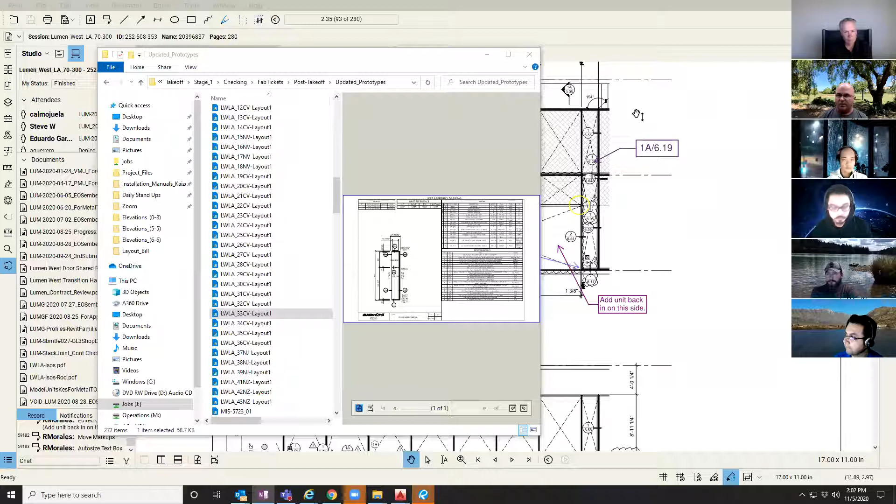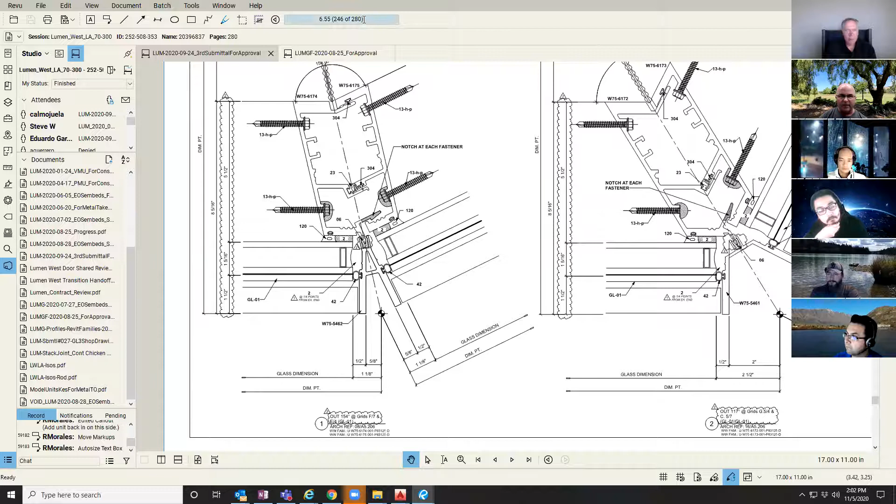On the recent project we're working on, this lumen has a lot of very complicated conditions happening. There's some very specific things happening when we get to some of these corners and how the parts are working, how the vertical trim and the head members, the cut lengths of our horizontal face stops at the head and the sill. We have an articulated vertical mullion with an offset to the front and back, and it's got very gigantic glass in it. So there's a lot happening on the project.

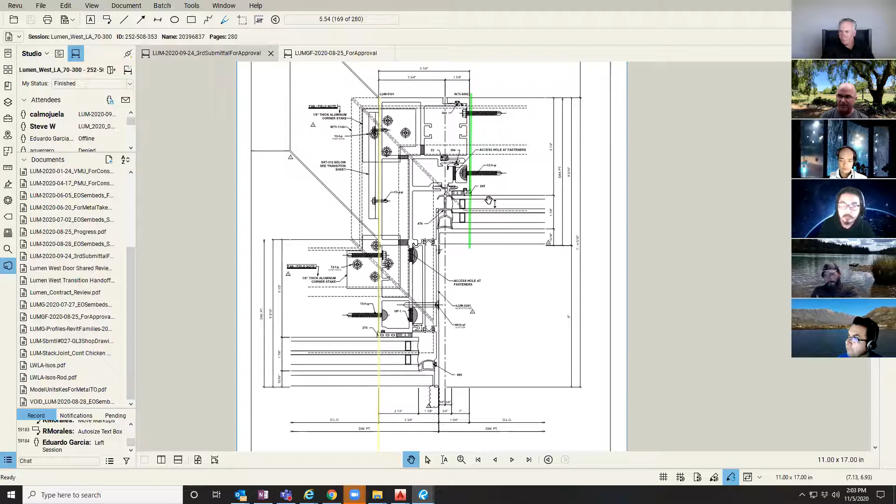We built out a series of prototype units and refined those a few times as we were going through. The shop drawings were getting further refined based on having calcs done, some markups from the drafting and takeoff team. The PM noticed some items. So the set we're working with now, this 924 set, has incorporated a lot of updates from when we first started building the prototype units.

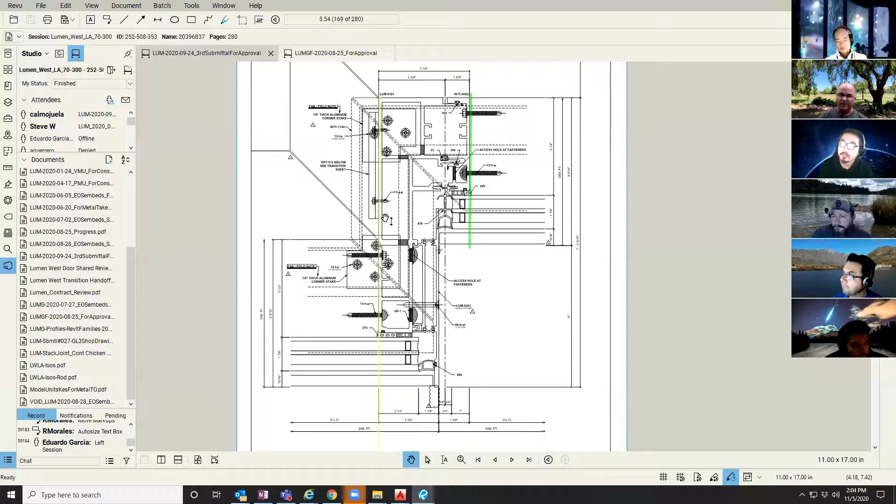We recently went through and finalized what all the prototype units were doing. We fine-tuned them so they've got a lot of additional detail in them. So I wanted to show a few examples of how some of those parts are working, some of the CAD layouts we're doing, and some of the logic we're trying to encompass in those prototype units that should enable us to do our checking process without having to rethink the entire project, because we've done that work up front.

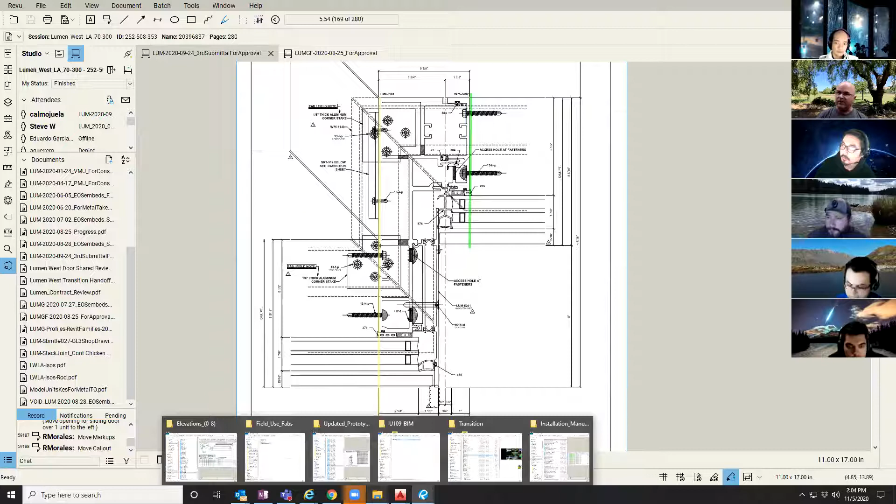For the example, I want to use this unit 33CV. So what I'm going to do is put shop drawings on one half, and then I'm going to open up this blank one on the other half.

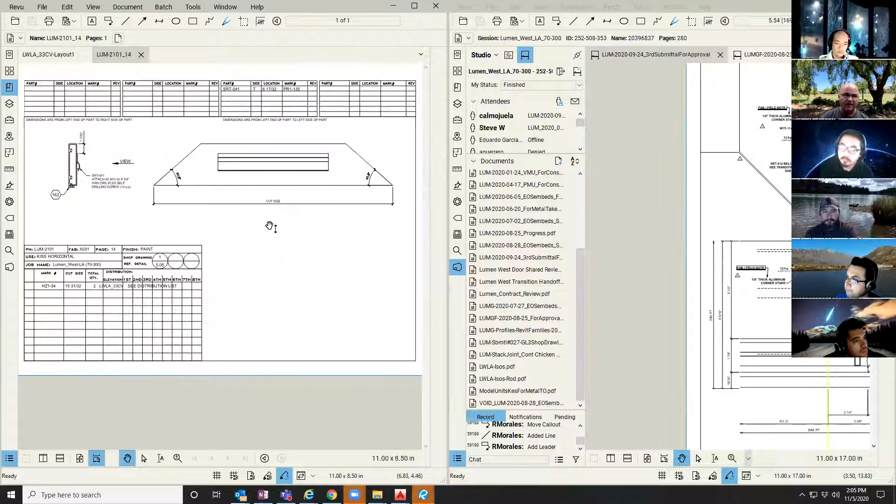This is an updated prototype unit. As a prototype unit, it was developed with the same left and right detail. Similar to a lot of the prototypes, in this case it's a corner. If you check a horizontal type part, it's going to be mitered on both ends. In this instance, it's a 41.5 degree miter on both sides.

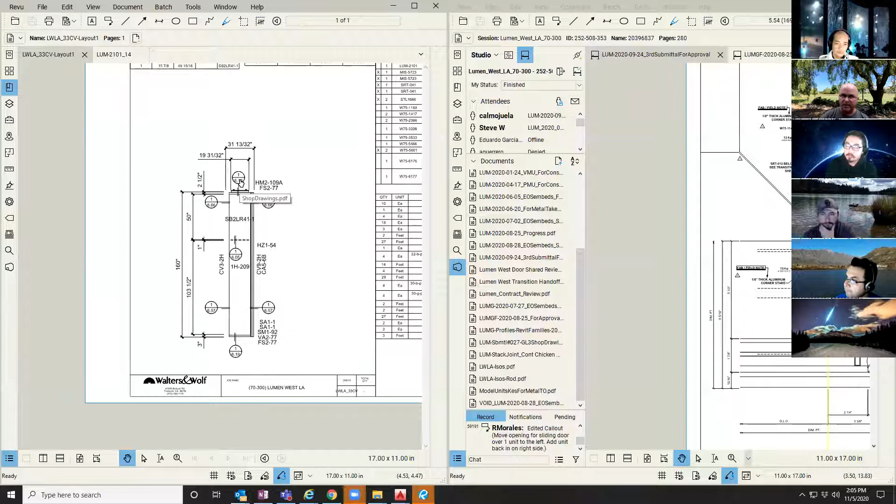We have the cut size laid out here as 19 and 31/32. The DP to DP dimension here is 31 and 13/32. So if you were strictly looking at the PDF, you could still determine what the DP to the cut size is on this particular miter, even if you ran across this on a job condition and had this 1/6.57 detail, which would be this particular corner.

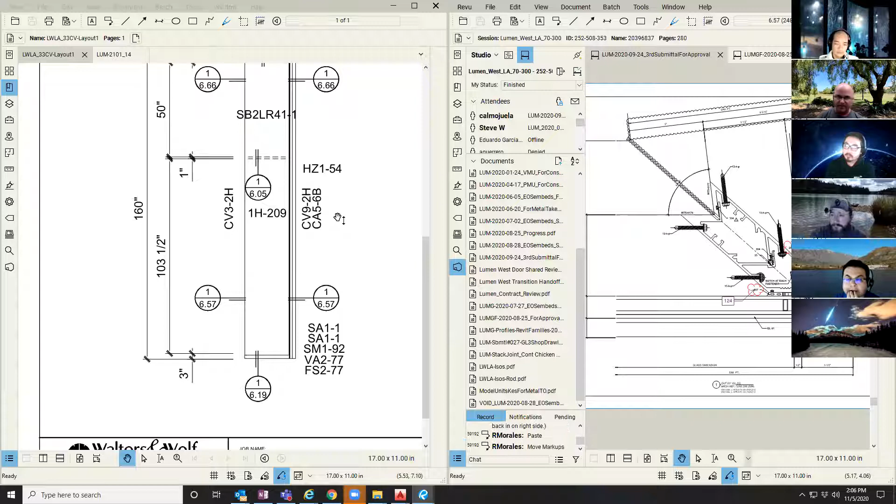If you had this on the left side, for example, but then had a different detail—either an articulated vertical on the right, or maybe there are some walls that are straight, so it might just be a split mullion on the right—by looking at how the math is set up from the DP to DP compared to the cut size on the part, you could do your deduction, dividing that in half because this deduction is on both sides. That would give you the deduction from the dim point to the cut size on any of the horizontal parts.

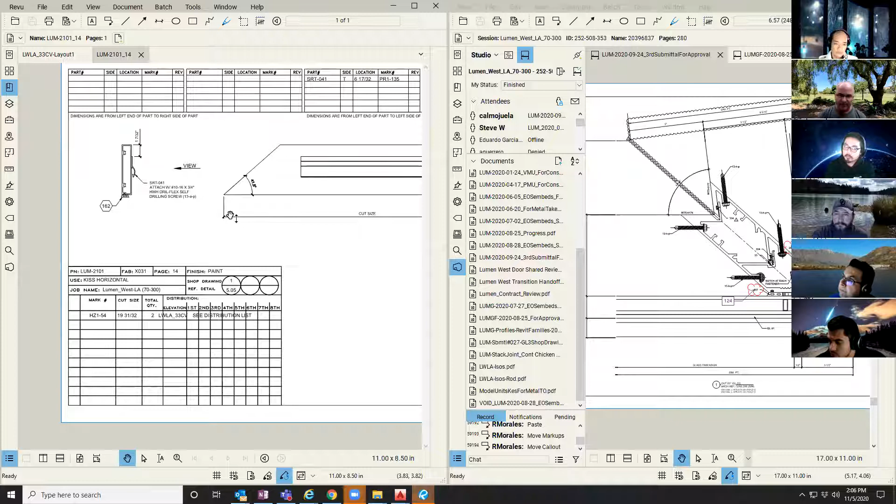So that's one method we might use to do that. The other way, however, is we have this on the detail, the 83 degree. We did a whole series of CAD details—let me bring this over to the screen.

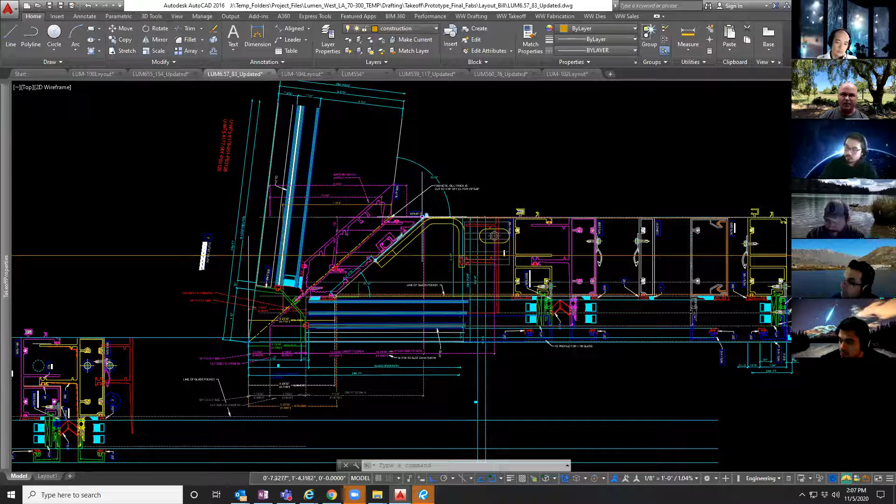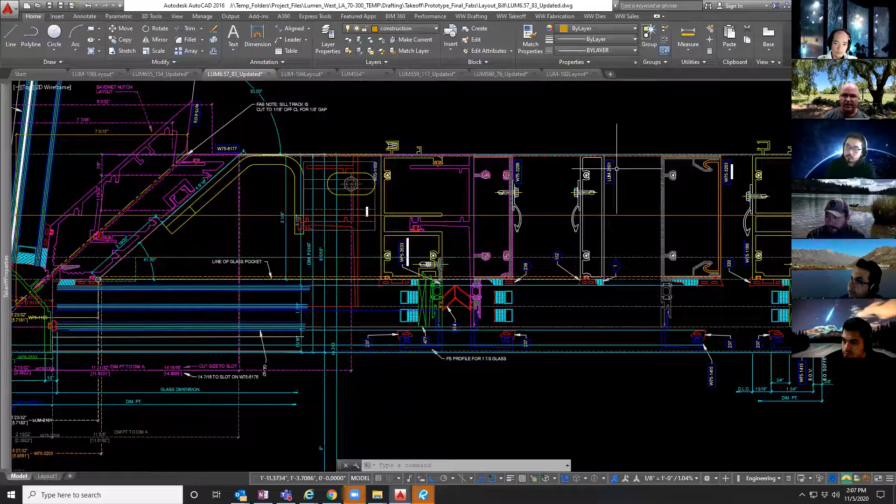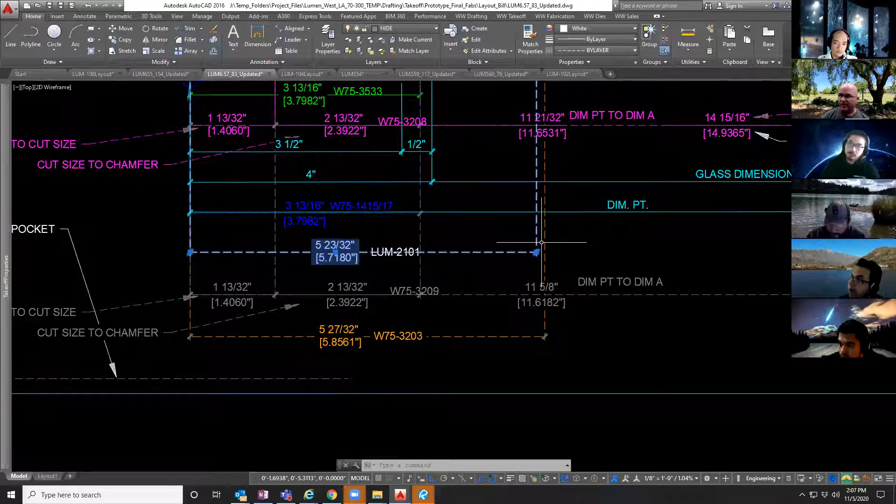The CAD detail shows the vertical parts, the orientation, what the degree of the corner is, and then it's got all of the horizontal parts dropped in there, color coded so you can actually see each of the parts and their cut lengths. That particular part I brought up first is this LUM 2101. If you hover over that white line, you see it highlights that part, so you can see the overall shape, how it's sized. It's cut to daylight, and the layout here is from the dim point to the cut size of that part. So that's another method you could use if you wanted to use the CAD drawing to review that.

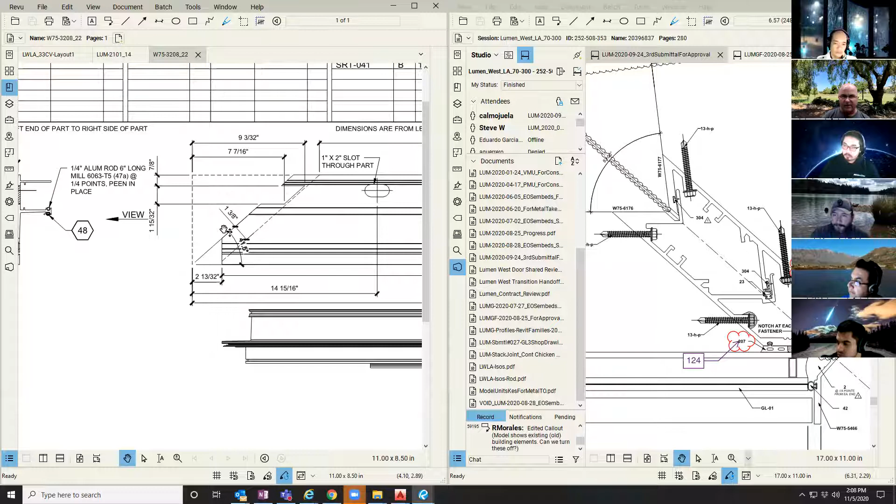Let me go back to the unit for a minute. If you were tracking your way up this unit, when you get to this head member, you'll see that it has a lot of things happening on it. In addition to the miter, it has to overlap the top of the vertical. It needs to be notched for the bayonet. There's a slot in it in order to access a floor type hook lug. The corner has to be lopped off in order for the face stop to work. And there's cut size, dim A's and dim B's. So there's a ton of things happening here.

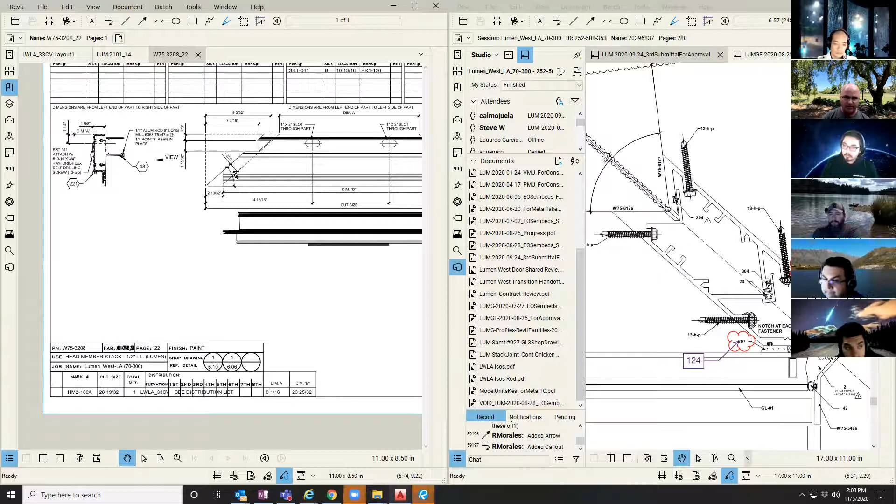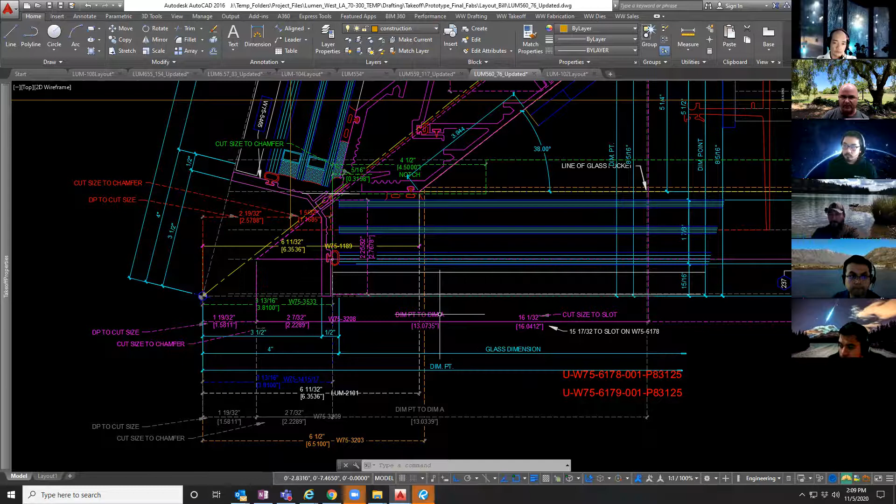If you are going to check this to verify each of these conditions, and you went back to your CAD drawing for that, this was the 76. You can find each of those conditions on the CAD drawing, and they're all laid out with the part numbers, the deductions, what it is from the dim point to the cut size, from the dim point to the dim A. It's showing where the slot goes, where this is the slot where you have that floor type anchor that's being used, but we need to access it to be able to basically jack the unit up and down to level it at the corner.

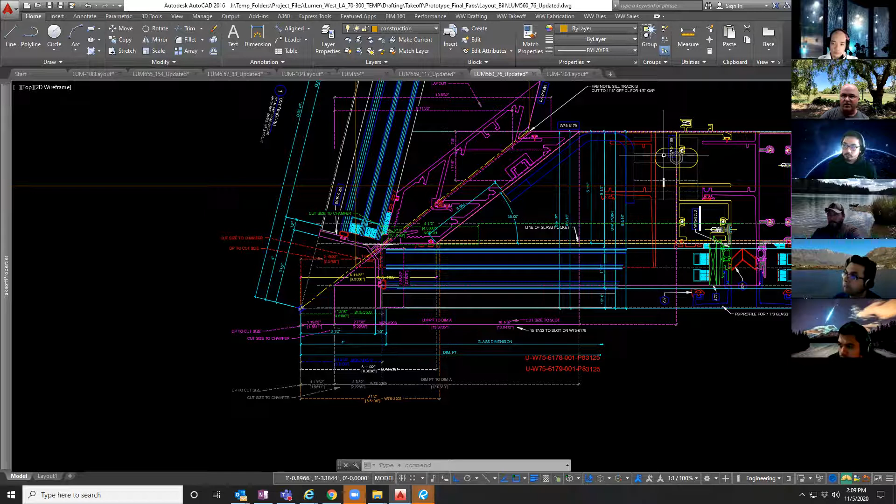And all of these layouts have been verified. So if you came across this particular unit, you could go and validate all of these points using this CAD drawing because they've all been laid out.

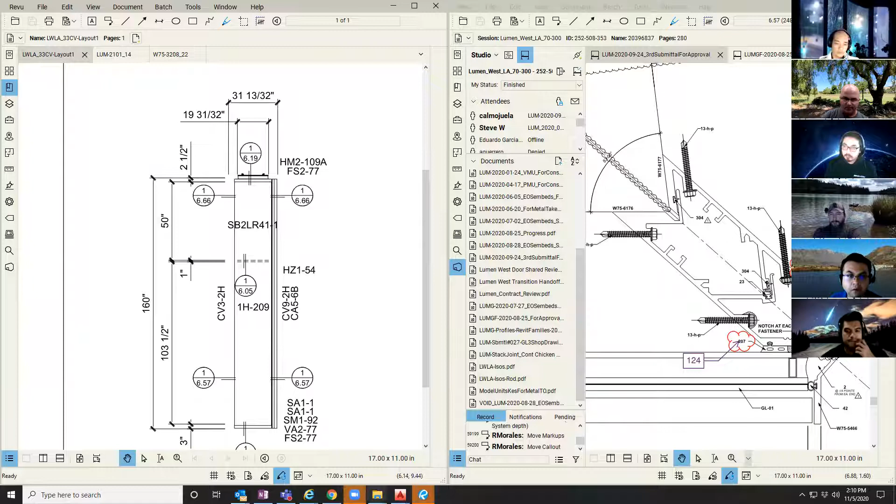But the shortcut that I would propose is that realistically, when you get to this unit on the elevation, you only need to go to - now this is a prototype, so this is not a real unit, but let's say this was your DP to DP. You would just need to go from the DP to the cut length on that part, which again you can get based off of here. And on your head member, it's this 3208.

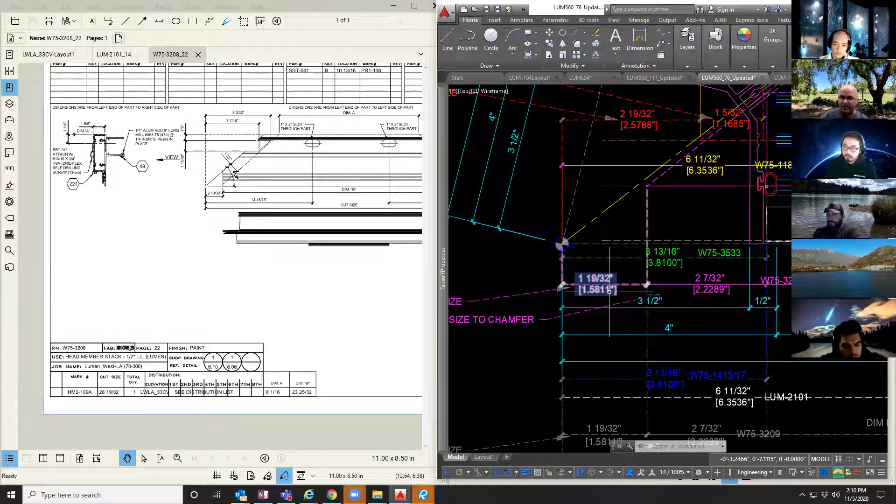So you find your 3208. The cut size from the DP to the cut size is listed here. So in practical terms, you could just go DP to cut size on this end, find whatever the other detail was. So if the other detail was this articulated vertical, and it was this one in the front, then you would find that part, go to your cut size on that on the front side, and then you'd be able to do that deduction on the other end of the unit.

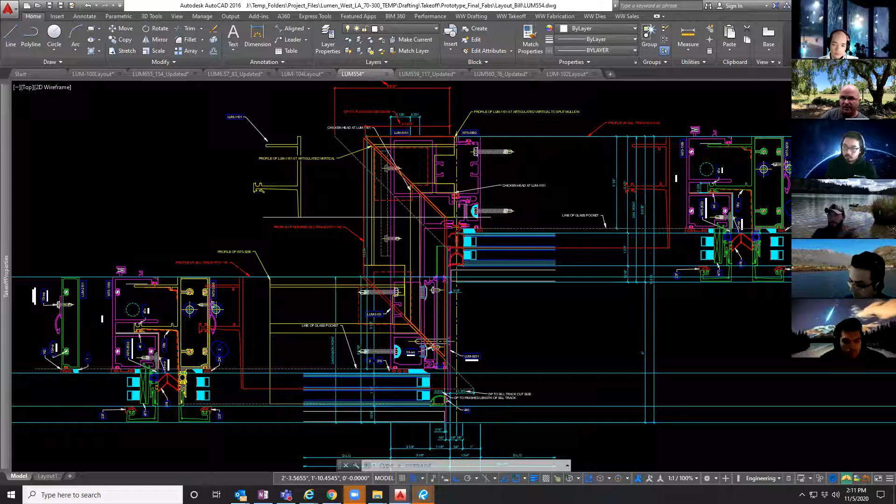After you did those two deductions, match the cut size. The remainder of the fab that's on here would already be validated based on the prototype units in the setup.

So in order to create a slightly refined checking process - the prototype units have been validated, and all of the layouts, you'll see that there's different offsets to that slot from the left and the right end. So all of those are completed and verified.

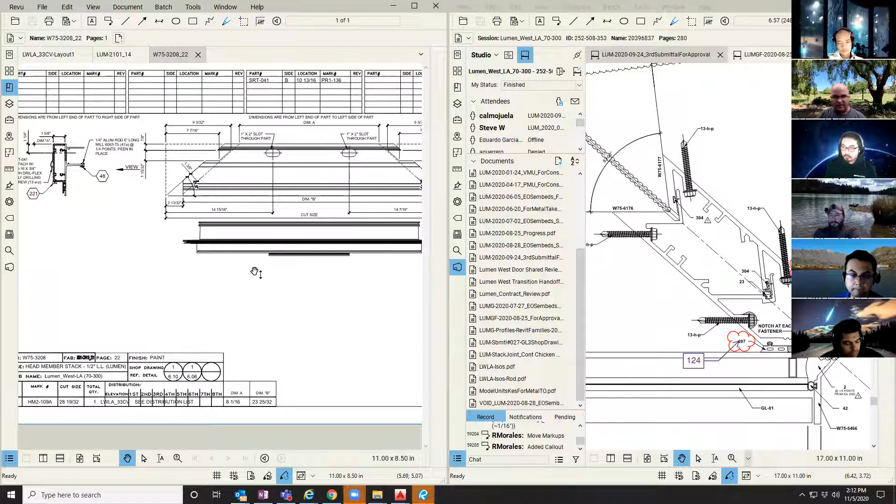So in practical terms, if you know that's the correct angle for that part, and then on the other side, you could look at the cut size for that other template as well. Then you can get your cut lengths and all of the associated dim A's, dim B's, the pocket filler lengths for your SRTs - all of that would be correct.

So that's just an additional tip on how to use some of the information that's already been developed in order to streamline that checking process.

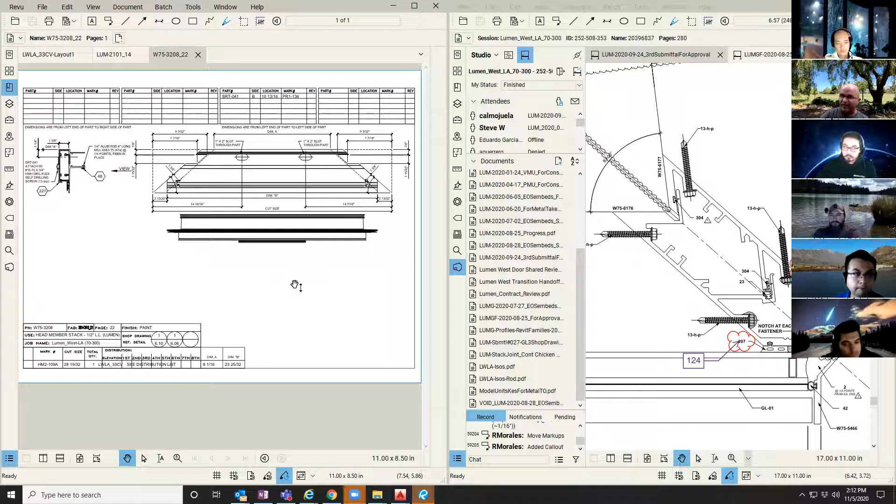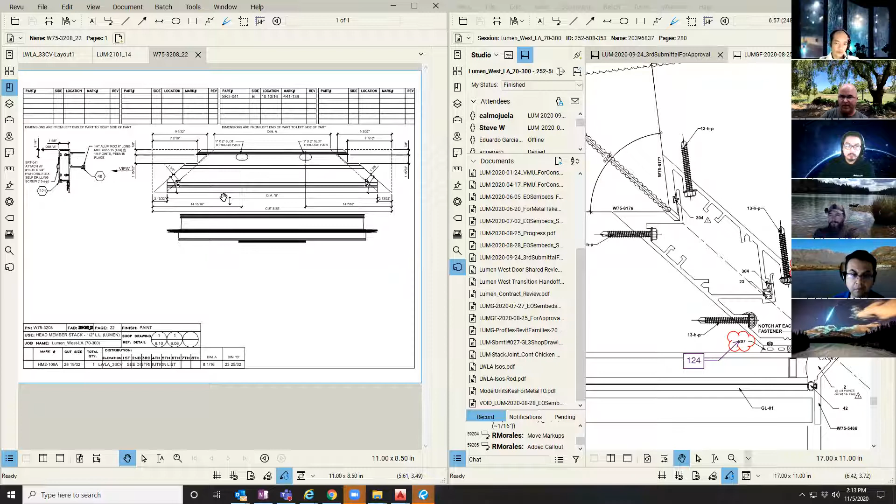That doesn't mean that you don't look at things and make sure that they make sense. In fact, if you were looking at this for the first time, you may want to verify each of those independently just so that you're familiar with them. But once you've got to that point where you understand how it was developed, how we got these templates built based on the prototypes, then you can use that little shortcut to just get your cut size, and the rest of it is already correct.

Okay, so let me open up the floor for a minute on that item. Commentary, questions?

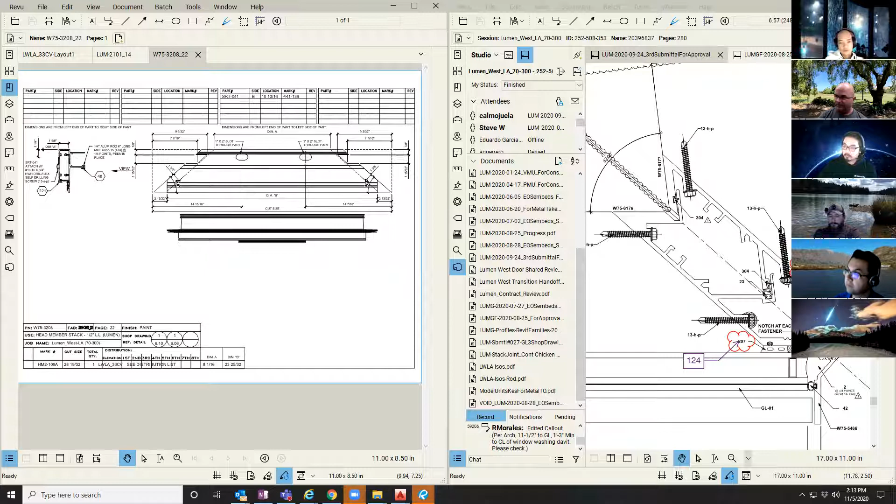It seems like that is... I don't know, I feel like I'd be hesitant to do that, Bill, but I guess it makes sense, as long as the end cuts and everything match what's been established before. But I guess you'd have to be the one that had worked on that before and know that's what they're supposed to be, or have something else to compare it to. It just seems like a lot of times the end conditions with these notches might be a little different from part to part for a variety of reasons, so you'd have to watch out for those kind of things.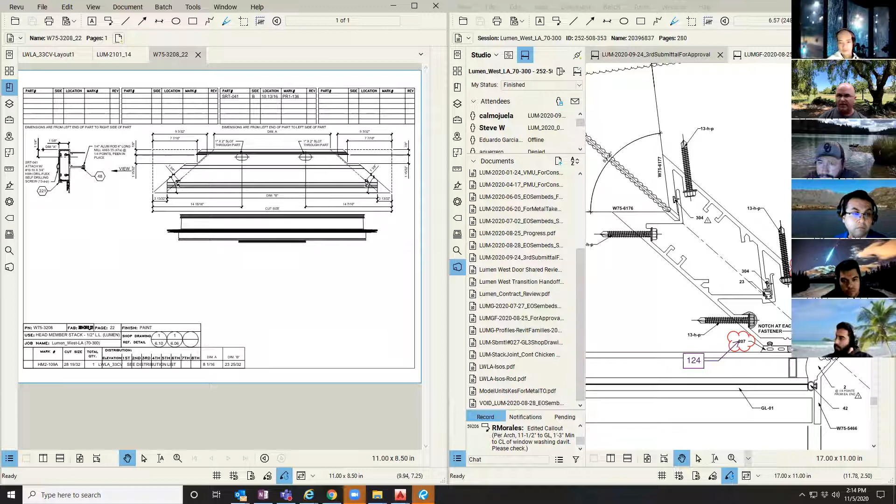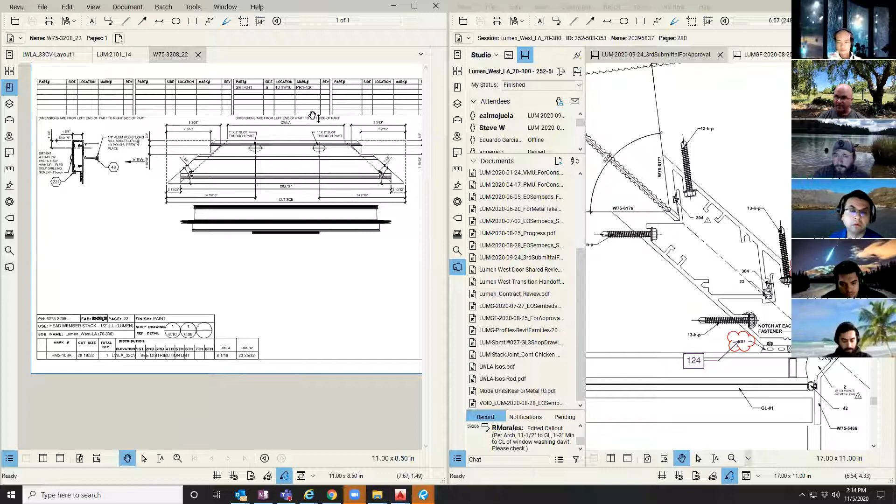And the other caution there is that if you have a left end and a right end and they're assembled, they're going to be on a template showing the equals, because your left and right end would be a fab whatever equals a whatever. So those combined versions of the templates, you'd need to look at them to make sure they make sense. If, for this part on that CAD layout, it was showing that was only 12 inches, but you were showing a dimension similar to 16 inches, that might trigger that the left and right connection didn't make sense. That's why we look at things with a critical eye to make sure things make sense.

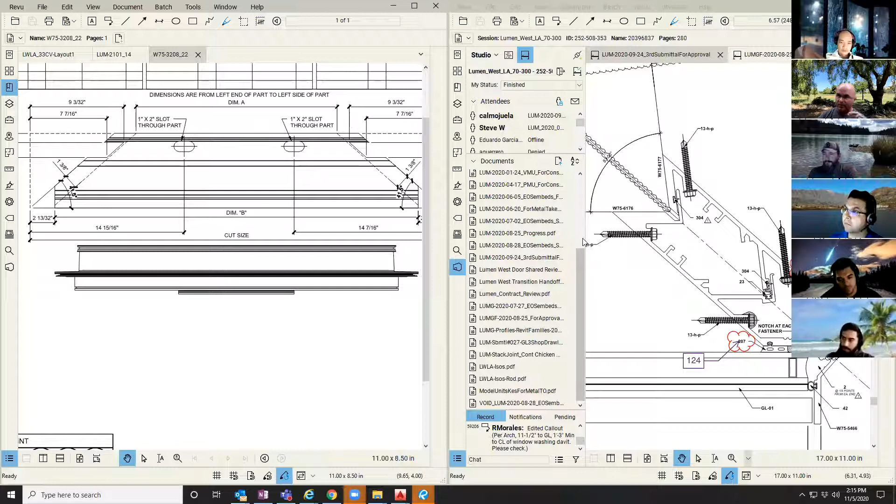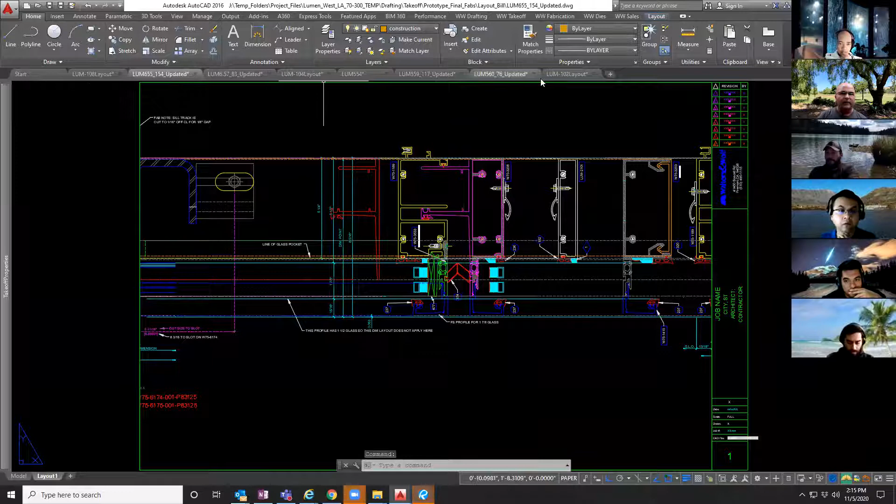But Quentin, I like that the thing you pointed out especially was that I'm familiar with these because I did these layouts. Chris and I worked on these a lot, we refined them several times, and so I have that high level of trust. If someone's coming in from scratch, you need to build that trust a little bit. The way you would do that is by going to these layouts and seeing, okay, this is how that thing works, I understand what's happening here. It makes sense. Then when you combine this layout with this layout, the 554 and this one, when you combine those two and you're proving your math, then it starts to make more sense about how the parts are sized.

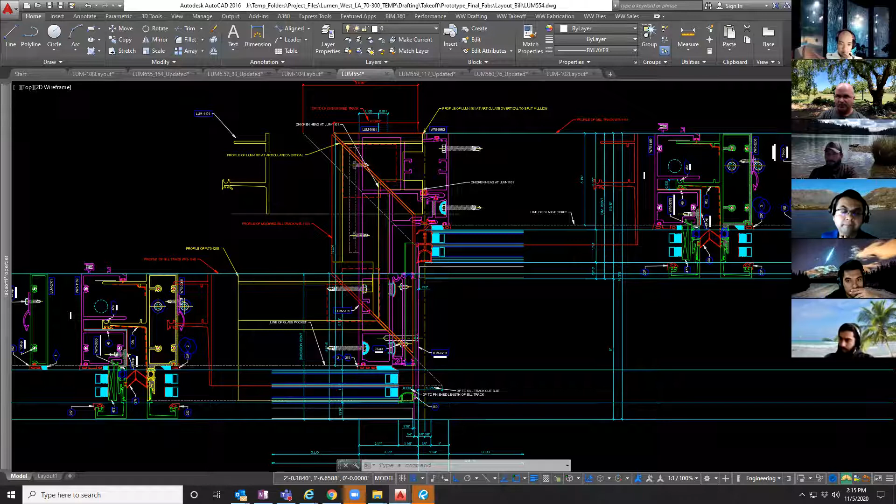So also another comment, if you go back to the PDF, I don't think we normally show, of the part, that dim A at the back extending to the end of the part. So depending on the angle, that'd be something you'd pick up in your layout. But is that ever a dimension that would be shown on the drawing like this? Because if we just go through, we figure out our cut size based on the dim points, and then you can see dim B would be pretty easy because you can subtract those two and 13/32nds from each end.

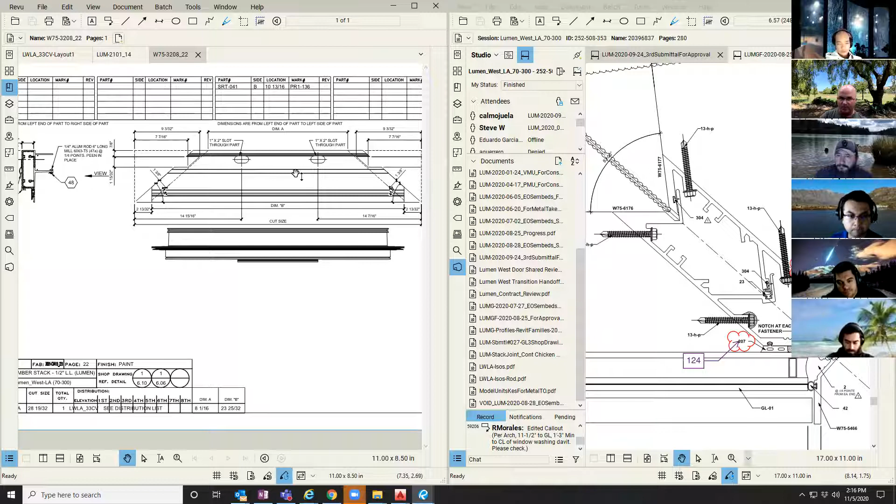Yes, but then dim A, you'd still have to refer back to your layout to know what deduction to take from either end. Correct. And in this case, because there were so many points critical to how the part indexes, especially because it ties in with the corner beads, and these run through where the horizontal face covers run short with a specific gap, we did intentionally add in the front finished cut dimension and the back finished cut dimension as well, so we got all of those reference details. If you were combining with another one, if it's articulated, this will just be a straight cut on this end, but you'll still have that dim A to get how that part notches over the top of the articulated vertical, and then how it comes over to this mitered corner.

I have a question. Okay. Can you have a dim B without a dim A? You could, if the dim A... the dim B was specific for what it was doing. You might have a dim B as a finished cut size on a compound mitered part, for example, and that finished cut size might be a byproduct of the cut length and the compound miter. So if it was aligned with the glass pocket, if it was a vertical part tilted back and cut at a compound miter, your dim B might be your finished point, long point to short point along that glass pocket. So you may not have a dim A on it.

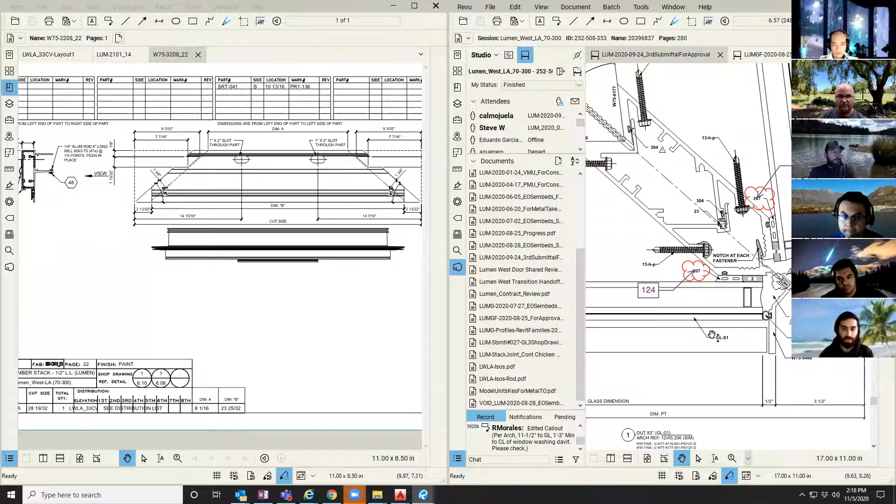So on your fab, is this something we've established where dim A would be your back finish dimension and dim B would be your front finish dimension? So like, let's say for a sill member at a capture, you don't have that notch that goes over the vertical, right, so it would just be a straight 45, but then you need that front notch because of the trims you have on the corner trim. Yes. Would we still dimension it and call it a dim B, and not really need a dim A, because that miter will handle that cut size?

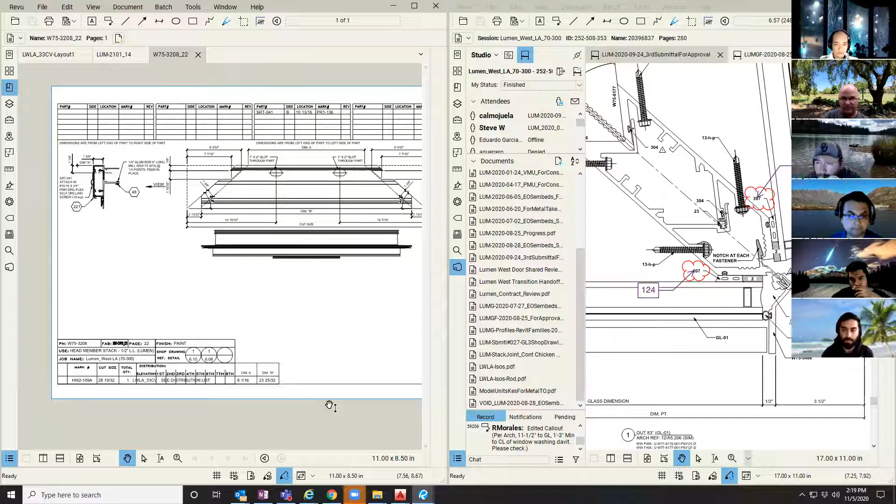That could be one way that we use it. We haven't documented that yet to see if that's the decision. I know Chris was tinkering around with some ideas that dim A would be in a specific plane on the part, where dim B would be in a specific plane. So basically dim A on the back and dim B on the front. But we haven't solidified that yet.

Okay, because I'm asking because Lumen ground floor has that. So I need some type of dim, but should I call it dim B or dim A or something else? I would say if it's going to be similar parts, we have a similar setup for the Lumen parts. Try to keep the dim A's aligned with how we have dim A set up here. And if you don't need that cut length, then just call it dim B. Cool, yeah, I agree. Okay.

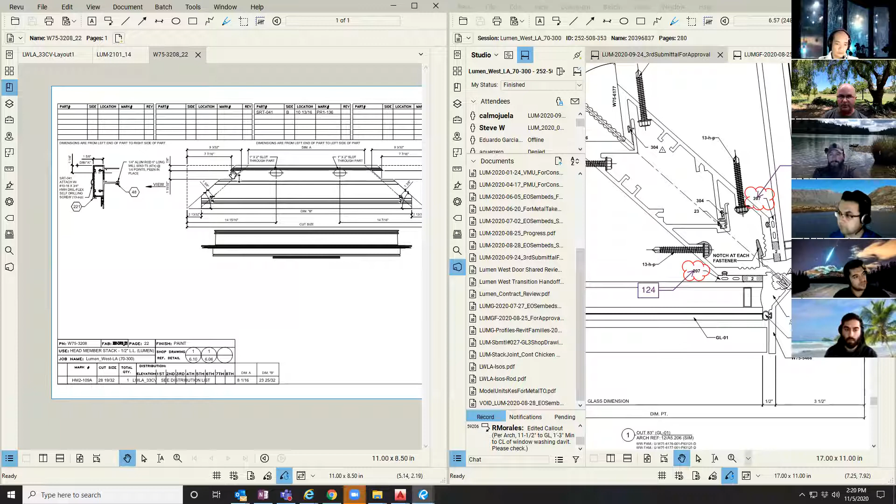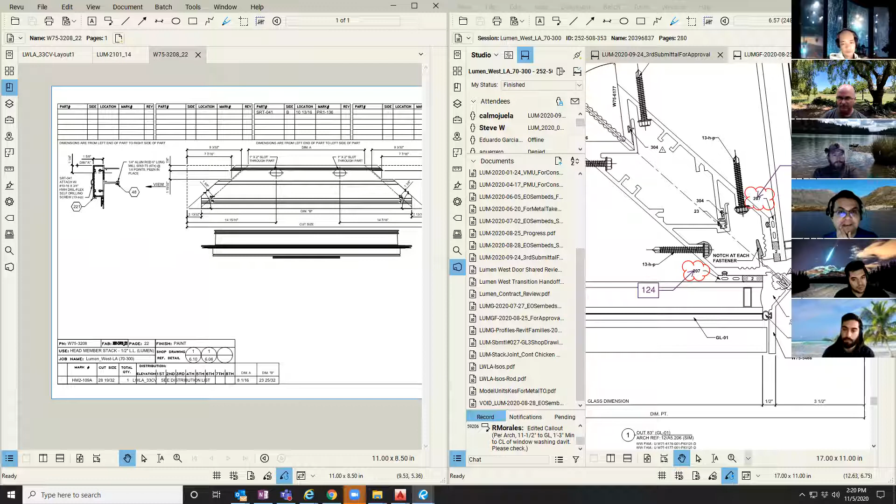What I want to mention is that I like the idea of the color codes on the CAD file, because I know downstream when we started the process, it was hard to understand the logic on the cut size. But I really like the idea, like you have the part with the color, and I think it's pretty easy to find and to follow the logic when you're checking units. So I really like that idea. It was hard, yeah, I knew there was so many things going on here.

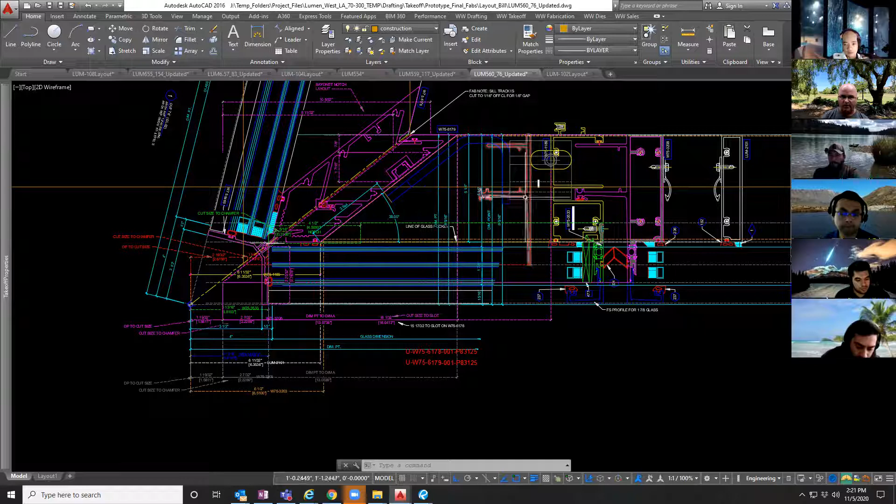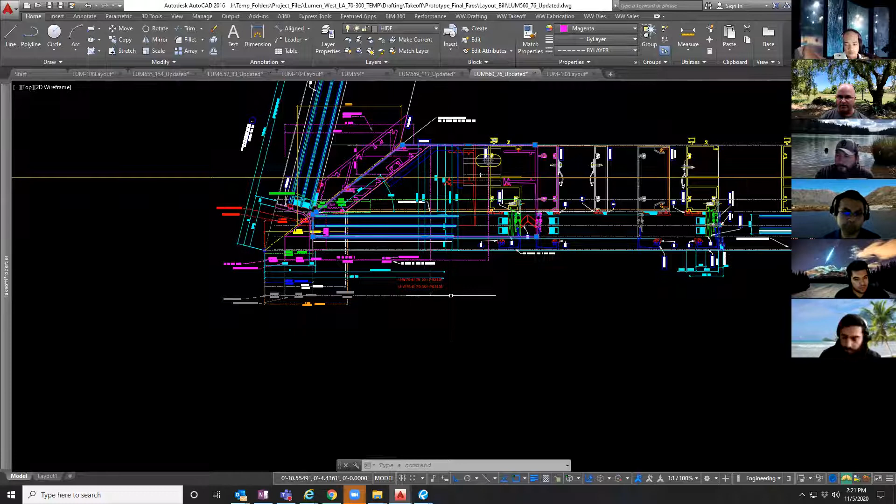I wanted to make it so that the visual controls made sense. So each of the parts is color coded. Plus, you can actually see the profile of the part when you go to the sill part, that's where the sill is. When you go to the head, that's how the head needs to be notched, for example. So all of those things are incorporated into the layouts because there's so much happening there. If they were all just on a single color or a single layer, it is hard to see.

Yeah, and the other comment that I have, it's only an idea, because I have something similar when I'm working on the sunshade brackets and brake shape. I know it's completely different logic, but can we create a folder into the project for each single project, so we combine all those kinds of layouts or something? I know it's on the prototype units, right? But I'm talking about that.

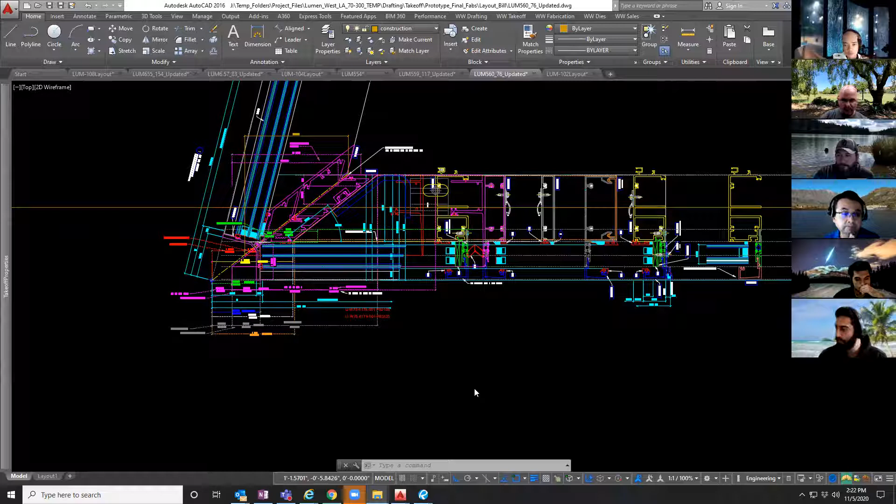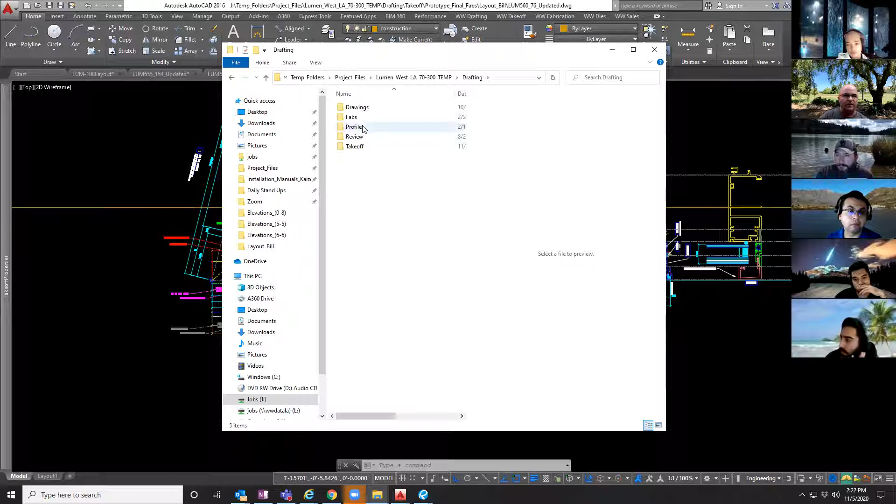So we do. Let me just walk you through how to find that type of folder. When you go into, this is the temp folder in the J drive, but let's go to Lumen here. When you go into drafting, then under takeoff, we have the prototype final fabs. So there we have the layout folder. So this is the layout for all the things that are specifically related to the prototypes. Now sometimes we'll also do additional layouts that are more for quick reference, and they don't have the amount of detail that we put into those.

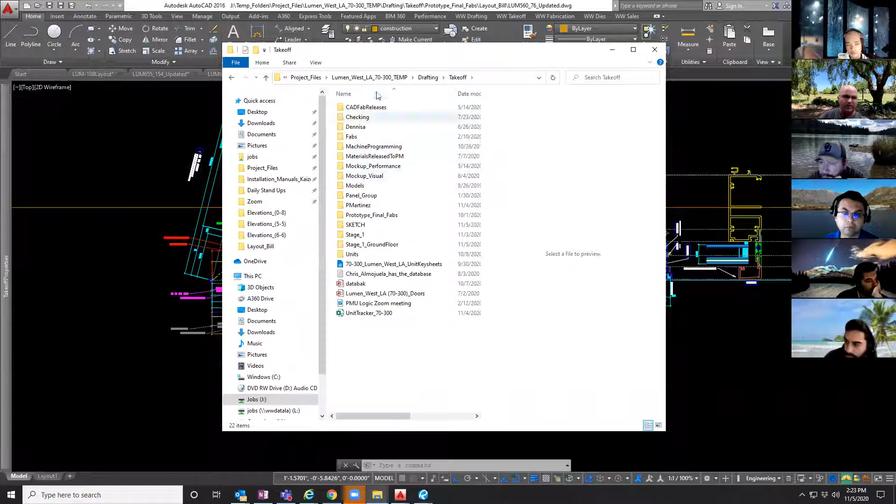So if you're doing that, then under drafting and takeoff, there's a sketch folder. And so you've got the different sketches, sorted by type here. So all of the sketches that we've done so far. In this case, Eddie gave us a bunch of the layouts for the embeds, so we could verify what was happening. We have a lot of small steel clips that our sill tracks have to attach to. So we've done a lot of the sketches in order to save copies of these, where we're maybe saving an occasional layout here, but not a fully formed layout like what we see in the prototypes final fabs folder.

The prototypes folder is specific to the layouts that were developed in order to create the prototype units. So it's these types where you're actually developing all of the logic and the sizes. And then the sketch folder is primarily for when you're creating a working sketch in order to develop how some of your sizing or notching or some of your layouts is working. And it's usually past the prototype phase when you start getting into that folder.

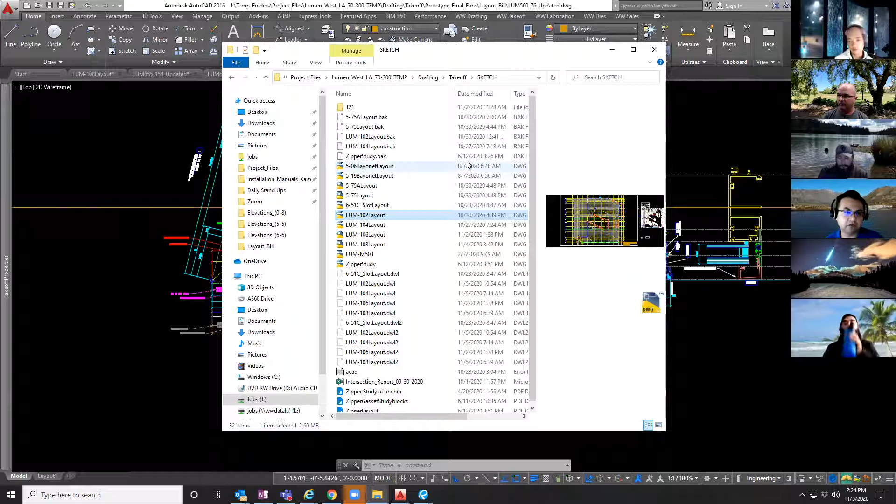Do you think it's a good idea maybe in the future? We could think about moving all personal sketches to somewhere, because right now all the brake shapes are floating everywhere. If we compile all those files, it will be great. Yes.

I think the sketch folder was mainly for items that shouldn't be in other locations, but you don't want to throw them away, and you still want to share it with the team. It doesn't have to be drawings in here. It could be Excel sheets, PDFs, anything that people would need in the future that doesn't belong anywhere else.

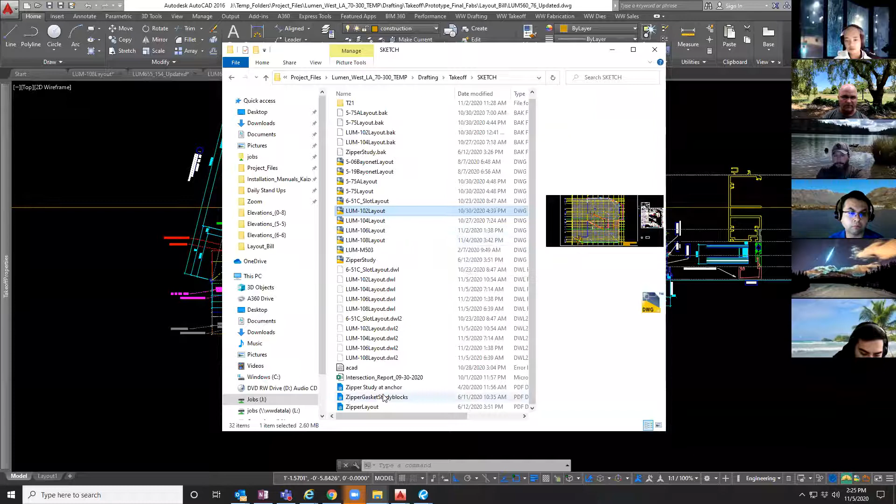I've got some PDFs in here of a zipper study I was doing to try to determine what was happening with the setting on some of the blocks. Any of those can wind up in the sketch folder. It's basically a place to capture what's on your mind as you're creating these various layouts, but other people might benefit from them in the future when they're working on the project, and you don't have to search for them because that's where they're captured, in the sketch folder.

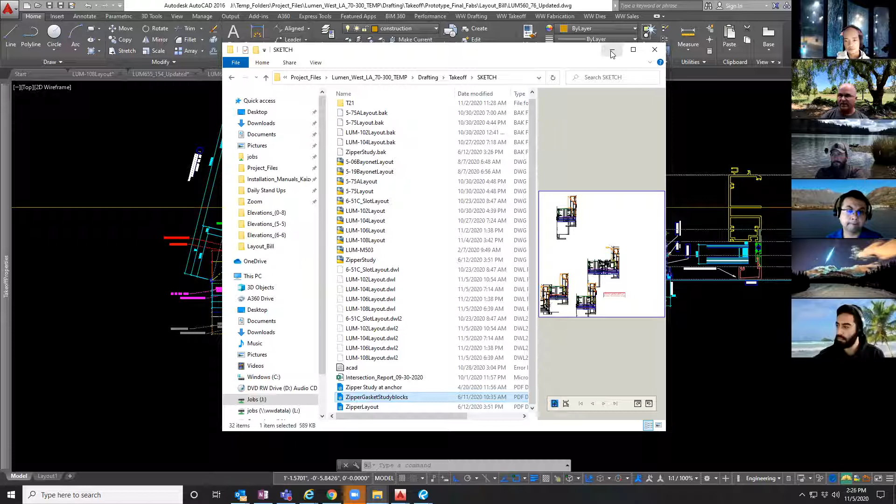Sounds good, thank you. So the sketch folder, however, is not a default folder. For my case, the first time I did a layout, I just put it in the sketch folder to start with. Then once I had it fully fleshed out, I moved the completed versions to the prototypes final fab. So I actually started in the sketch folder and then just moved them when I was done.

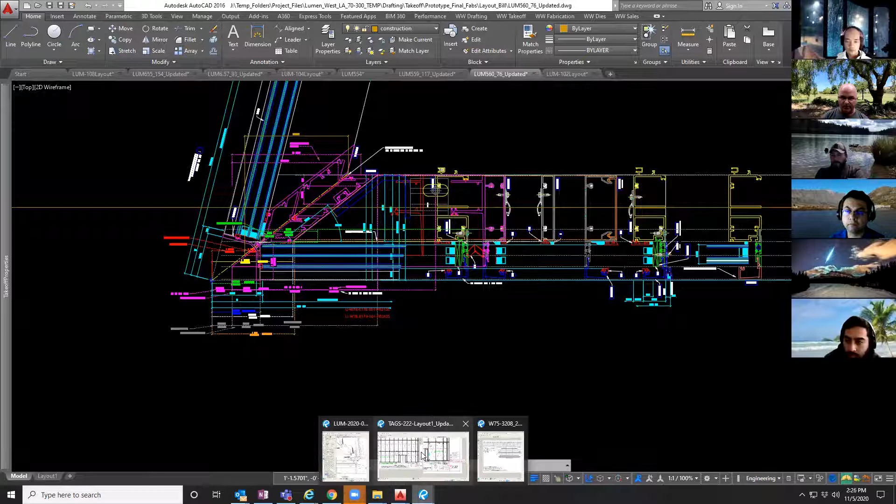All right, excellent. So, open format, doesn't have to be even related to this particular project. I have other items I can bring up, but I just want to open the floor if anybody has something in particular they want to talk about.

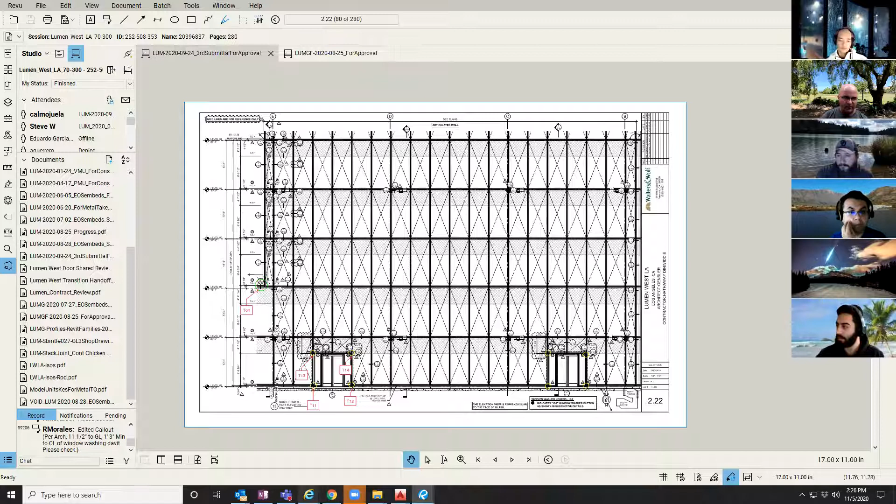Okay, all right, so next one is about Kaizen events. If you're doing a Kaizen, let me bring this over. If you go to our engineering training page, as you know, when we're doing training classes, first we publish them here on the classes we're going to be doing. You can see today's topic is checking tips and Stump the Checker.

After we produce those classes, they're listed down below in the classroom training content, and we have the classroom training. Well, several months ago, Brad, who does the Kaizen events, had come and visited with us several times, and he's still doing some occasional lean classes for us. So he had done a lean class for us, let me minimize this so I can see the name of it.

So if you go to classroom training, you've got this 'How to Run an Effective Kaizen.' This is the full lesson, I think it's almost 2 hours long, but it's also broken out into 2 portions. One of them is the 5 Why portion, and the other is the how to run an effective Kaizen, the SIPOC portion. That's the part I wanted to talk about in a little more detail.

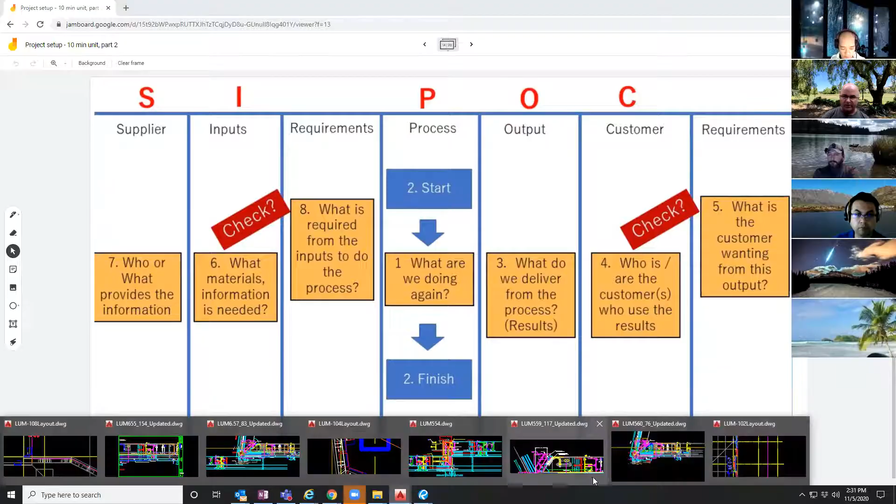What do we deliver from doing this process? In our case, we looked at the prototype unit setup and what are we delivering? We're trying to see, okay, we're making sure that we've built out this, for example. This might be one of the products of our work, is having this layout done so that anybody can use that in their future processes.

So then we're going to ask, who's the customer that used this? Well, in that one that we were just looking at, the customer could have been the PE and the PC, because you can use that to verify what's coming in. And then you can also use it to check the outputs of the tickets.

Then you go to, well, what is the customer wanting from this output? So if we were going to give this, and for example, if Quentin was going to be using that, he may want to know, well, what I really want to determine is what happens when I put those two together. How do I make sure that my dim A is correct when I combine a left side and a right side?

So that might be what's percolating in his mind, so we may have to ask that question. If we're just working on what our process is, but we don't know what our customer wants, then we might be missing something in how that process should actually be developing content for the person that's going to be using it.

So this is sometimes a key point that's overlooked when you're doing a Kaizen event. You get in, you're like, okay, this is how we do it now. This is how things would be better in the future if we did these certain things. But you may forget that you have customers for what you're trying to accomplish.

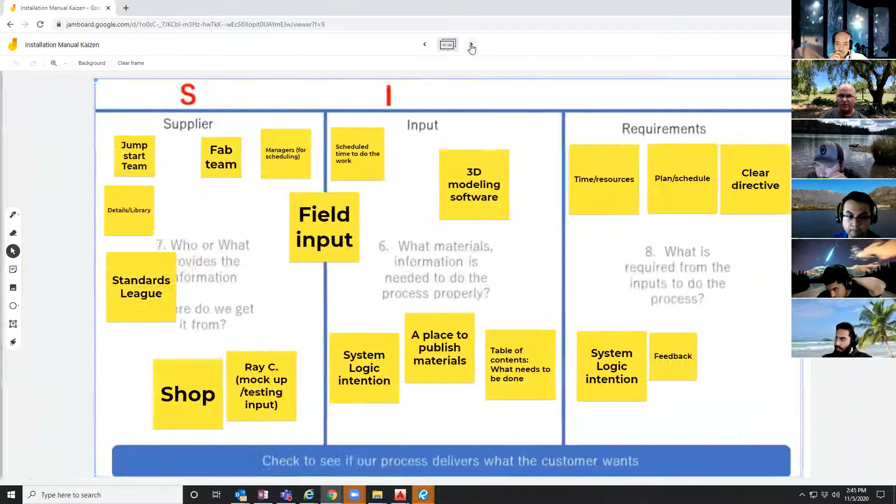Even as we were going through this process here and mapping all this stuff out, we had so many things and so many ideas that we were just toying around with. But then once we cleaned it up, we got rid of all that extra stuff and just created that simplified version of it.

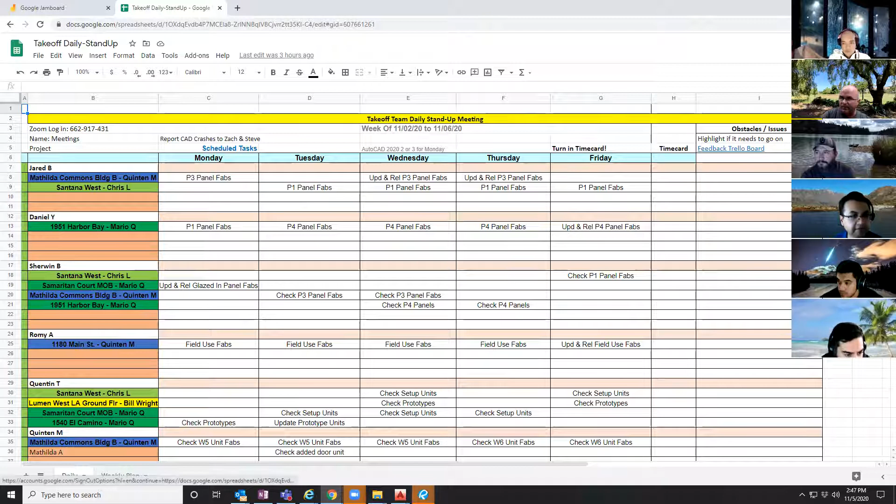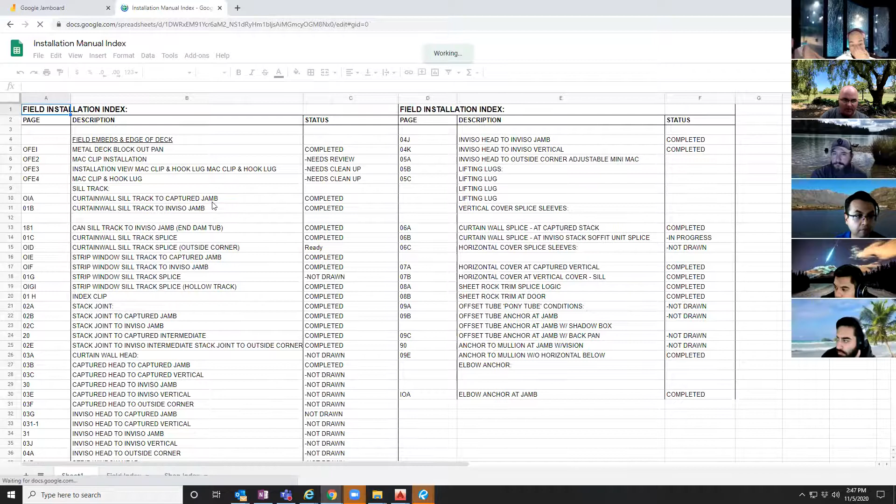The other one we have here, so I'm on the installation manual Kaizen team, so we're actually developing our sheets index for keeping track of what's completed on the installation manual process. I've converted those into sheets documents as well, so we've got a field index and a shop index.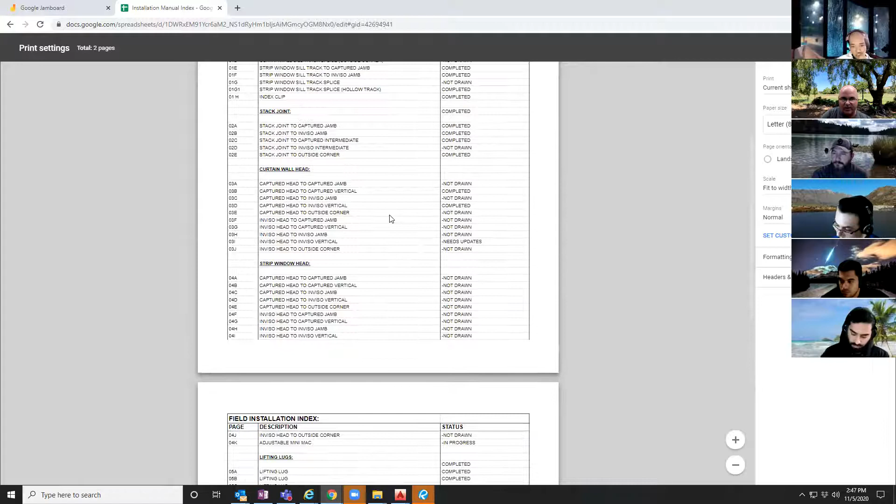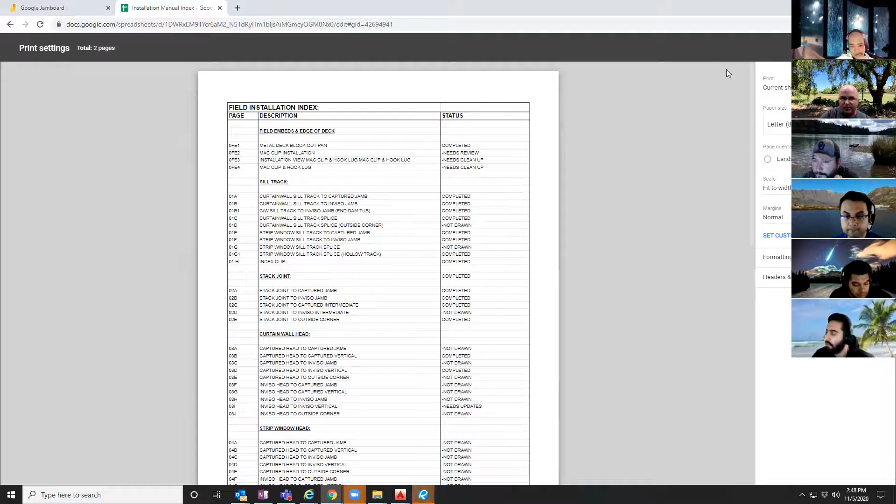These are set up so that these header bars are locked. So if we go to print this to PDF, for example, it'll print as many pages as we need. And even though I've only got that header bar on there one time, it reprints it on each page so that it'll be formatted correctly when we publish that into the installation manual. So those are some features that work well in Sheets.

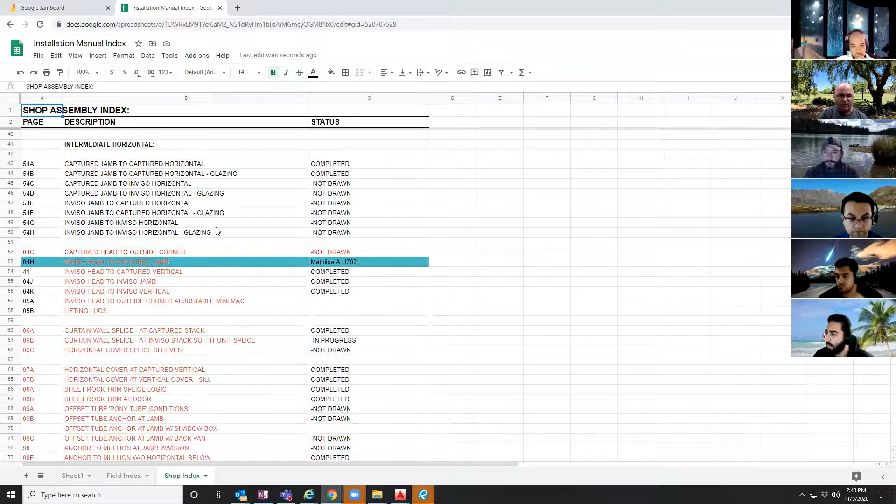And then I've got the shop indexes in progress. So that one's got a bunch of work to be done on it still, but same thing where the index is just showing up. This is locked, and then the rest of it you can scroll through.

So there's that one. The other one, we were talking earlier, when you go to the home engineering and training page, we have a lot of content here. So if you haven't visited this, or if there's some additional trainings that have been done that you're interested in checking out, your trainings are available here.

Sometimes it might be interesting just to, while you're doing your work, just listen to one of these training sessions, and you might pick up a few pointers that'll help you in doing your processes. The other thing is that the classroom trainings, like we're doing here, are longer sessions and they're being published.

However, anyone has the ability to make an improvement video or to create a process video for something that they're doing. If you create content and you want to get it published, we actually have a module for that right at the beginning. So it's creating training, start here. And if you want to just submit a video, you just click on this, send mail to submit video.

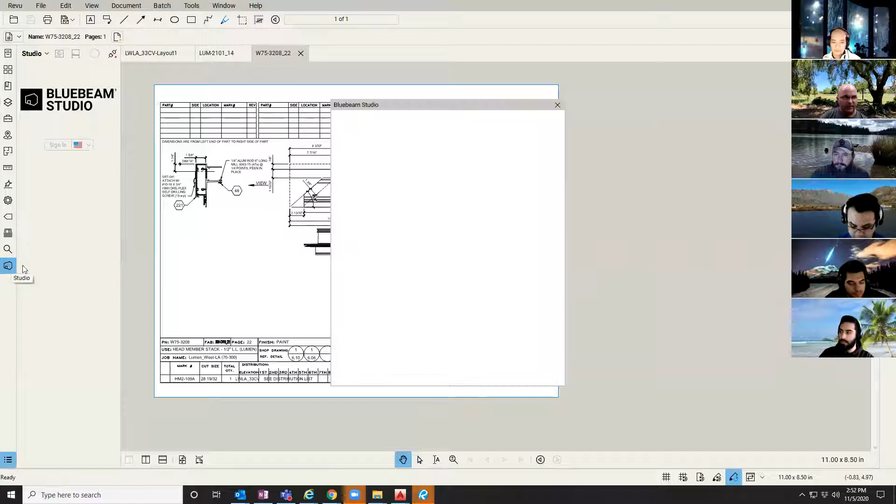Okay, I do have one more random one if I can bring this up. So in our project key sheets folder, when you bring up a key sheet, sometimes if you're doing a search, you want to try to find a unit number. You hit the U and then you start typing in your unit number, 0, whatever. It wants to autofill some of these categories.

So let's say if I hit that, let's say if I was actually trying to type in this unit 054, and if it wants to autofill this, and if I just hit enter at this point, it'll search for and find that U054. But I don't always want to find that U054. Sometimes I may want to find just the U05. And if it wants to autofill that last character, you can hit the delete key and then hit enter, and then it'll search for that number.

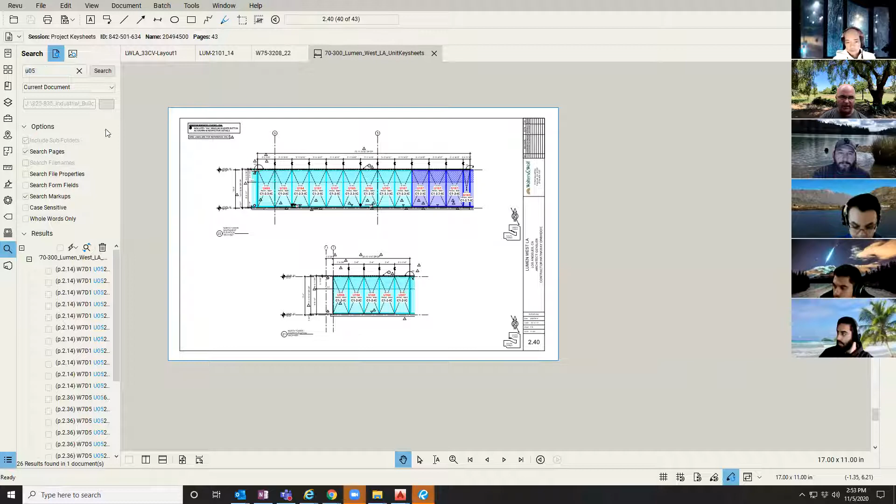So I've found that that is helpful when I'm trying to find, if I'm typing in a number that I've typed in previously into my search window, because it likes to autofill those. Okay, so just a little tip there.

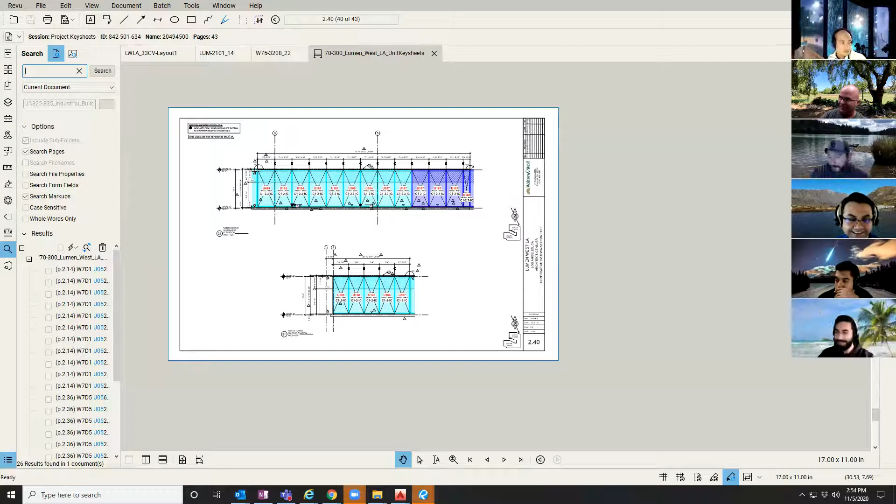Any questions or comments on today's training? Everybody happy? Yes. All right, very good.